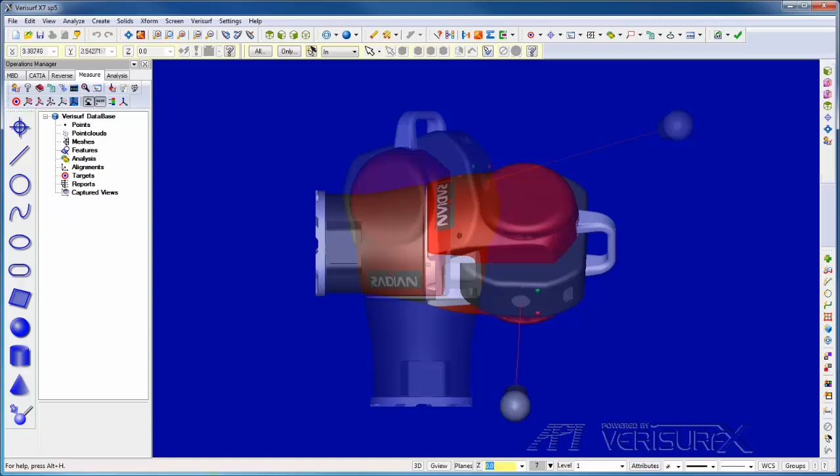The tracker has a measuring range of 160 meters, or 80 meters in any direction. The Radian includes both interferometer and ADM for accuracy as well as ease of use. The tracker mounts vertically, horizontally, or even inverted for measurement in tight quarters.

The iVision system uses an integrated camera for automatic target location and beam capture. Finally, the Radian includes an integrated weather station as well as an internal level. These are just some of the highlights of the Radian hardware. Next, we'll look at the software.

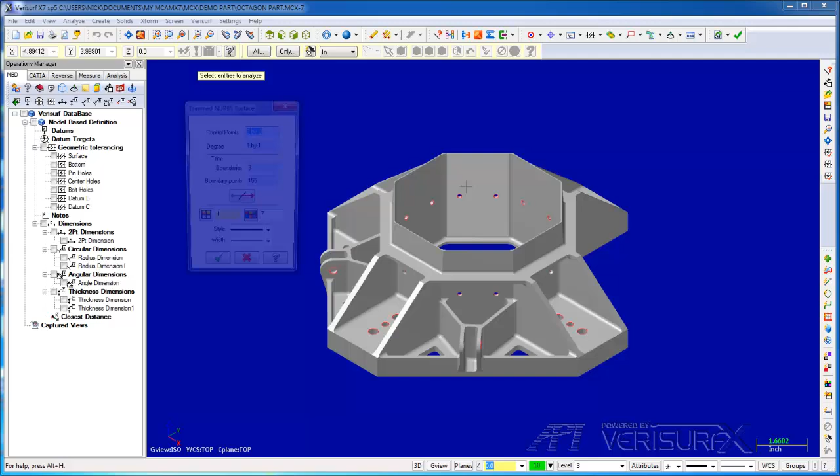Verisurf's metrology software is built on a CAD platform, giving it full CAD design capabilities. CAD is required for reverse engineering, but it's also very helpful when inspecting complex parts. For example, we can analyze the model, we can pull dimensions from the model, we can even manipulate the model. In addition, CAD tools such as colors, levels, and attributes allow us to manage large part assemblies.

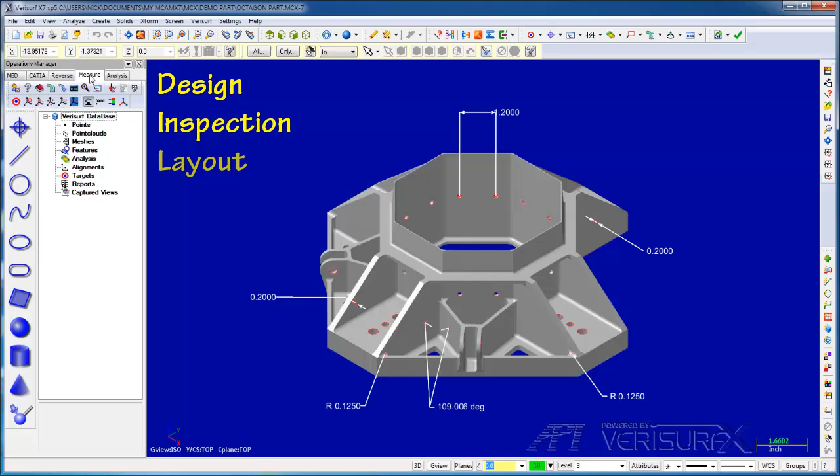Verisurf integrates design, inspection, layout, analysis, and reverse engineering all into a single application. Finally, Verisurf is designed for both print and model-based workflows. I'll continue by loading a model of our demo part. Verisurf reads all popular CAD files, CATIA, NX, ProE, SolidWorks, etc. in their native format. This avoids the limitations of neutral formats such as STEP and IGES, which Verisurf also supports.

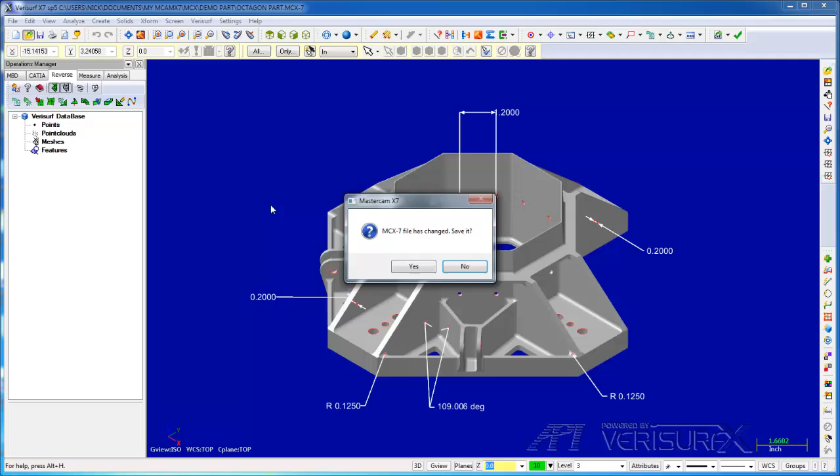When we open a native file, Verisurf saves it in the MCX format and leaves the original file intact. All the data, including the model, the measurements, the reports, and the analyses, are stored in a single file to simplify handling and to prevent data loss. I'll select the MCX format and open our demo part file. The part is in place and the model is loaded. In the next step, we'll align the Radian tracker to the part.

After we load a model, we typically align the device to the part so we can get real-time feedback on tolerance condition. We'll use auto-align since it's the easiest way to align to a model. We start by placing alignment targets on the model to control the orientation of the part. Since the Radian is in front of the model, we'll place the alignment targets where they can be seen on a clear line of sight from the tracker.

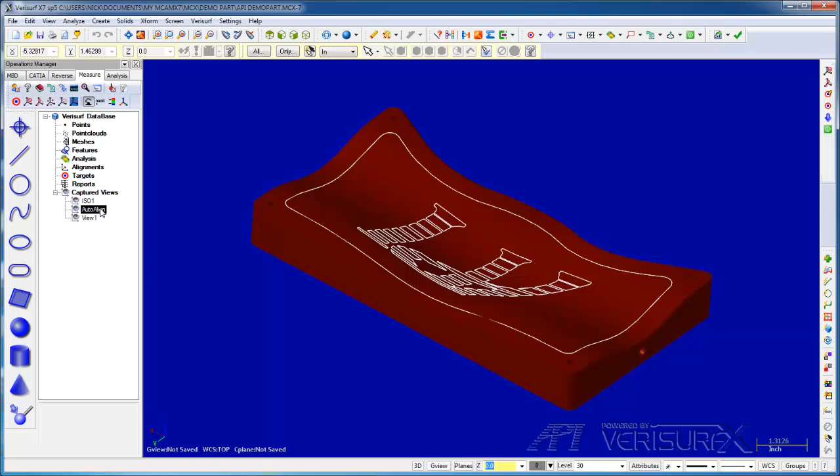I'll start by selecting an appropriate graphics view for the targets. I'll then choose Create Target and place alignment targets on the top, front, and side of the model. Since I want the graphics view to match the camera view, I'll restore the original view. Before I run the alignment, I'll edit the targets and enable Use Smart Point. When we use the Smart Point measuring method, Verisurf records the target when I hold the SMR stable on the part.

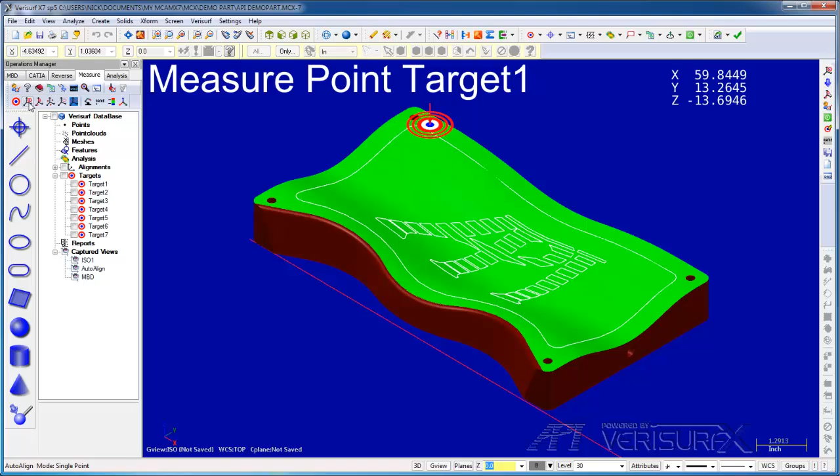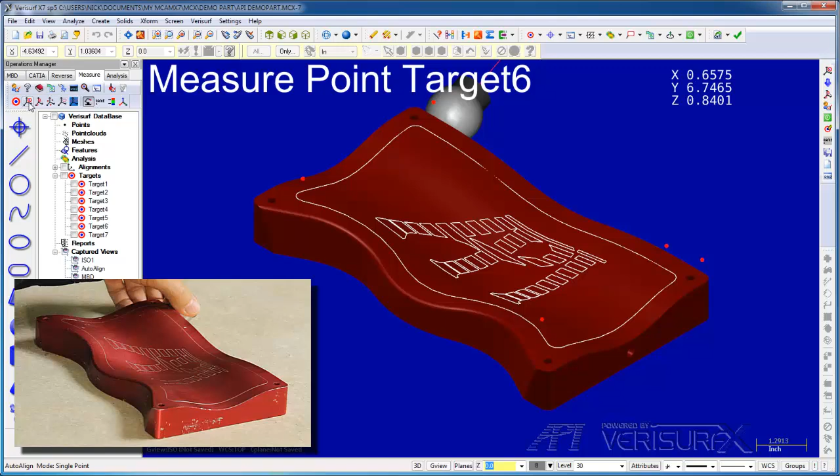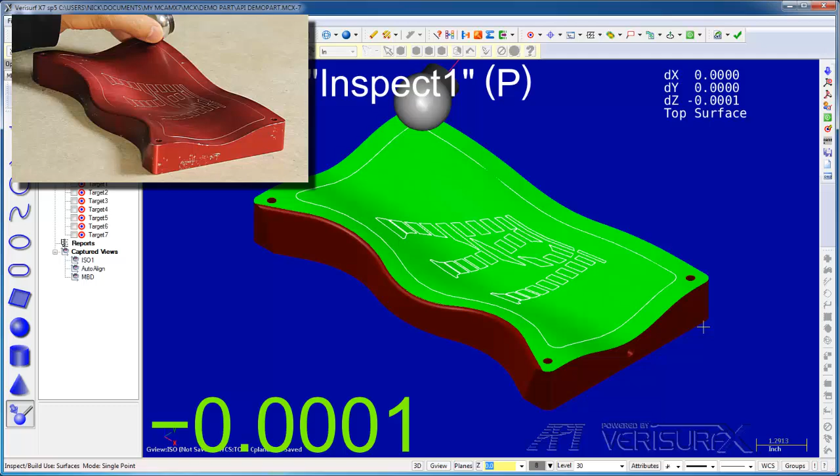The small deviations we see as I move the SMR around the part indicate a good alignment between the part and the model, which shows that our alignment is correct. This final check validates the whole auto-align workflow because it shows we had the right part, the right model, and we didn't make any mistakes measuring the part.

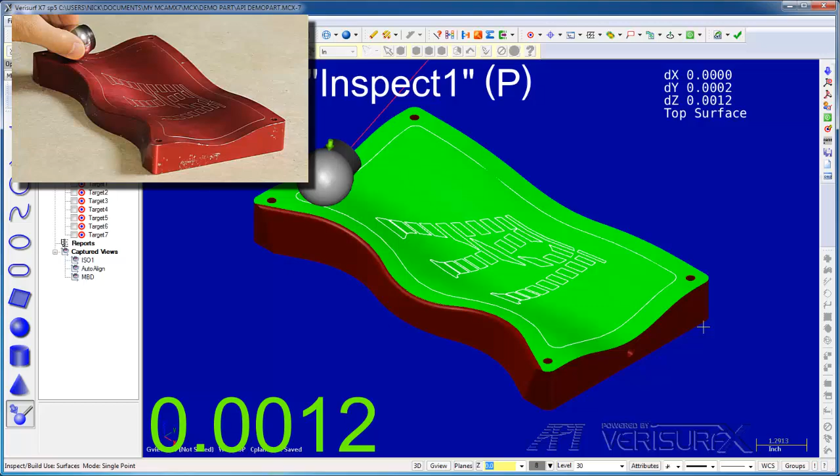Auto-align is a very powerful tool for model-based alignment, but it's easy enough for beginners to use, and the results are easily verified using Inspect Build mode. The Radian is now aligned to the part. In the next step, we'll check surface profile.

In the previous step, we used Inspect Build mode to verify our Radian alignment. Inspect Build is a special measuring mode that displays in real time the deviation between a part and the corresponding features in a CAD model. When we're inspecting a part, the deviation reflects the material condition.

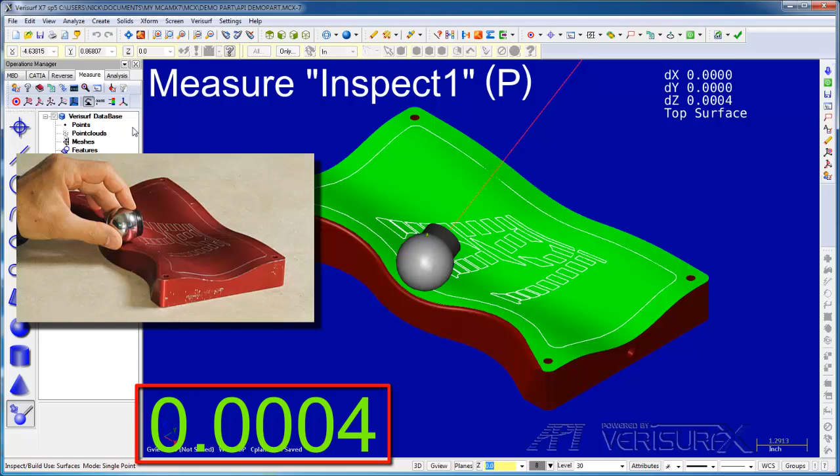When we're moving a part into position, the deviation shows us how far to move and the arrow indicates the direction. Since the Radian is already aligned to the part, when we check profile, we'll assume the deviations are due to errors in machining of the part. I'll continue by measuring deviations in single point mode on the top of the part.

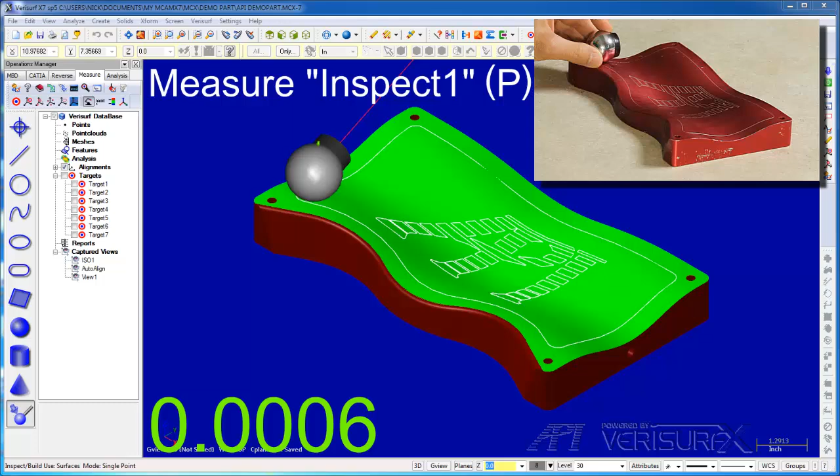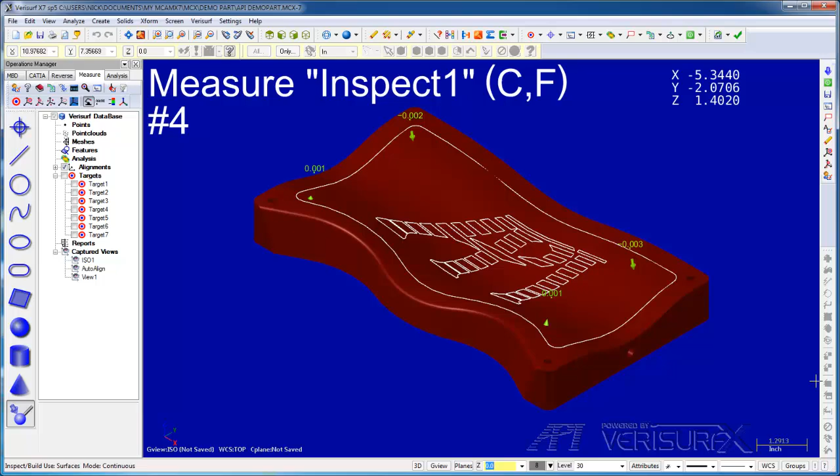Notice how the deviations are represented using an arrow and deviation text. Next, I'll switch to continuous mode and scan deviations around the part.

When I press Escape, Verisurf creates an analysis object in the data tree. If I highlight the analysis, we can see the distribution of deviations in the color bar. If I double-click the analysis, we can change the way the deviations are displayed. For example, we can add borders to the text, we can switch from lines to spheres, and if we enable

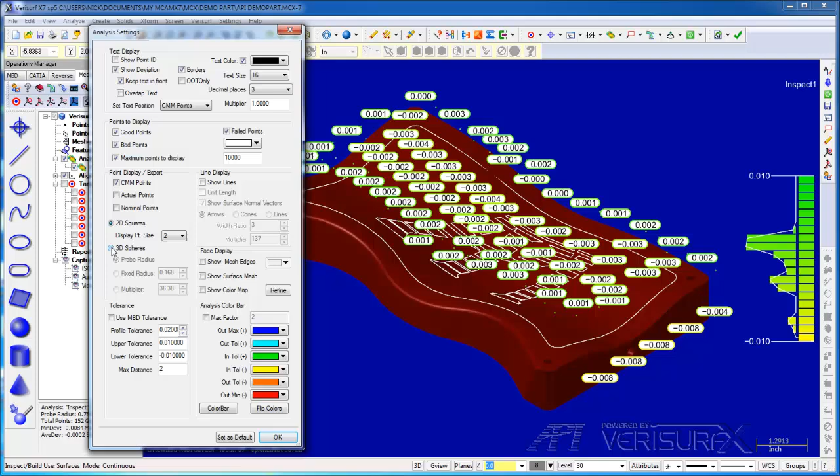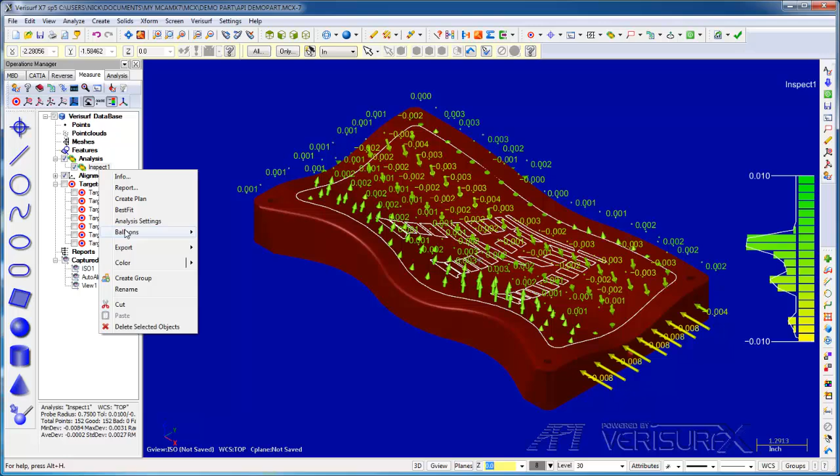Use MBD Tolerance, Verisurf analyzes the data to the tolerance callout for each surface. Otherwise, it uses the global profile. I'll restore the original display and then save the results. Next, I'll annotate the deviations using balloons. I'll apply balloons to 10 random points. If necessary, we can manually rearrange the balloons.

I'll save the results, highlight the analysis, and create a report. I'll rearrange so that the screenshot is on top. Then I'll access Settings and change the logo from Verisurf to API. We have a number of output options, including PDF, HTML, Excel, Word, etc. I'll leave it at PDF and create the report.

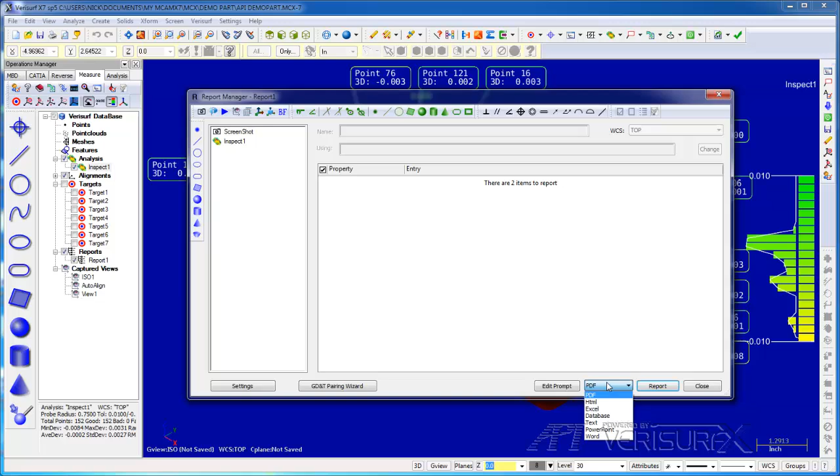When the report opens, we see the API logo in the header of the report. We see the annotated deviations in the screenshot, and we see the details in the body of the report. We've just seen how to use real-time deviation analysis to check surface profile. In the next step, we'll use it to position our demo part.

When we use build mode to position a part, we assume the form of the part is good and the deviations are due to errors in the position of the part. We refer to this use of real-time deviation analysis as build mode because it's often used to build fixtures and assemblies, but we can use it anytime we want to position an object in 3D space.

We'd normally start by aligning the device to the basis of the CAD model by measuring features with known CAD values. We did this in auto-align. We'd then build parts into position by moving them to their nominal locations. Since the API tracker is already aligned to the basis of the CAD model, we'll simply move the part and build it back into position.

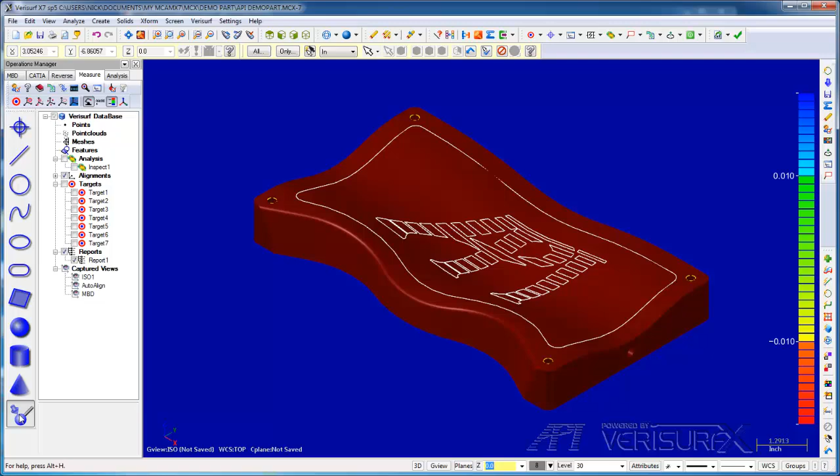I'll select and build to circles first because that's a quick way of getting the part close. I'll place the SMR into one of the holes and move the part in the direction of the arrow. This is just to get it close, so I won't bother using a pin nest. I'll then move to a second hole, repeat the process, and try not to move the first hole.

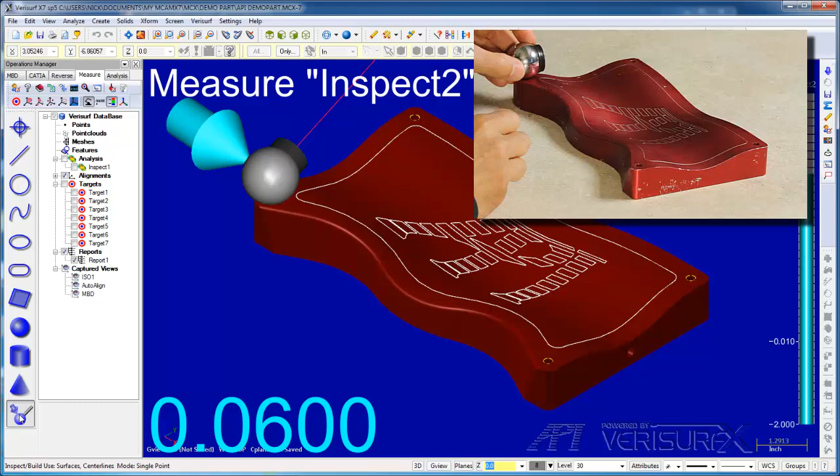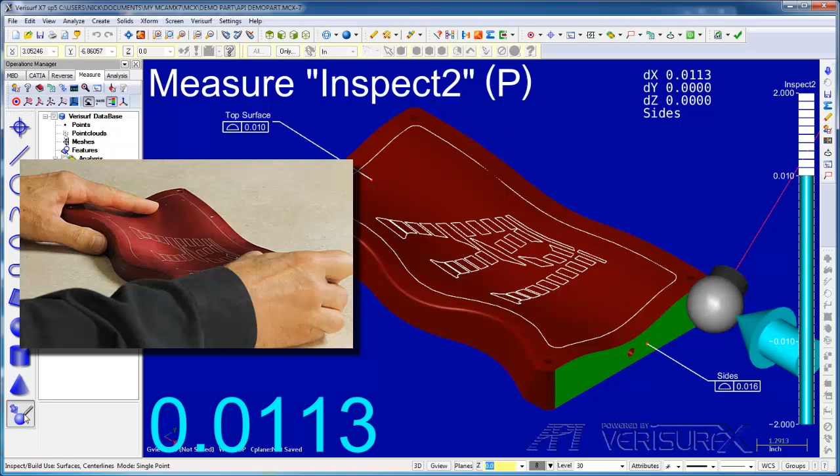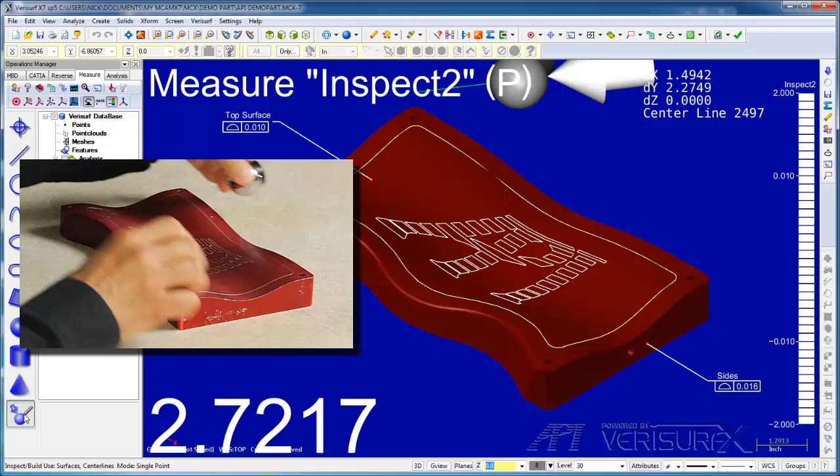When I'm close, I'll cancel the selection, display MBD, and build to surfaces to get it closer. I've enabled Use MBD Tolerance so we can use Surface Profile to control the build tolerance. In other words, as long as the surfaces are located within their profile tolerance, we'll consider that the part's in the right location. I don't have to get this to 0, I just want to get it within tolerance.

It's green everywhere, so we'll call it good. This is a very simple example of a build application. Positioning a part in 3 dimensions is much more complicated, but the process is essentially the same. We've now positioned the part within tolerance. I'll tweak it a little bit for our next step.

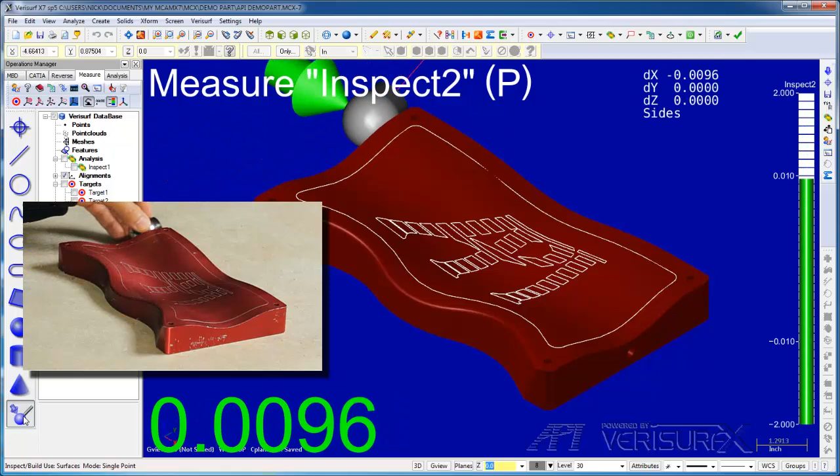We've used Inspect mode to check our part in real time. In the next step, we'll perform a similar analysis, but we'll start by measuring point clouds. I'll begin by running Inspect mode to verify the device alignment. We know the part is good because we've already inspected it, and we know the alignment's bad because we left it that way at the end of our build demo.

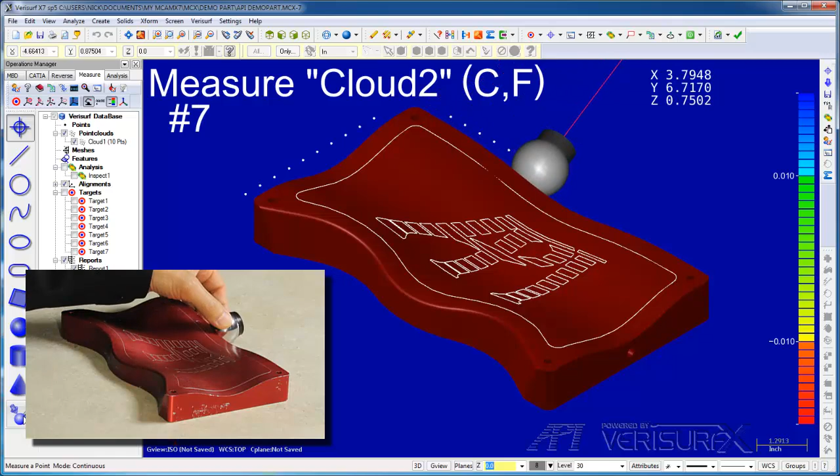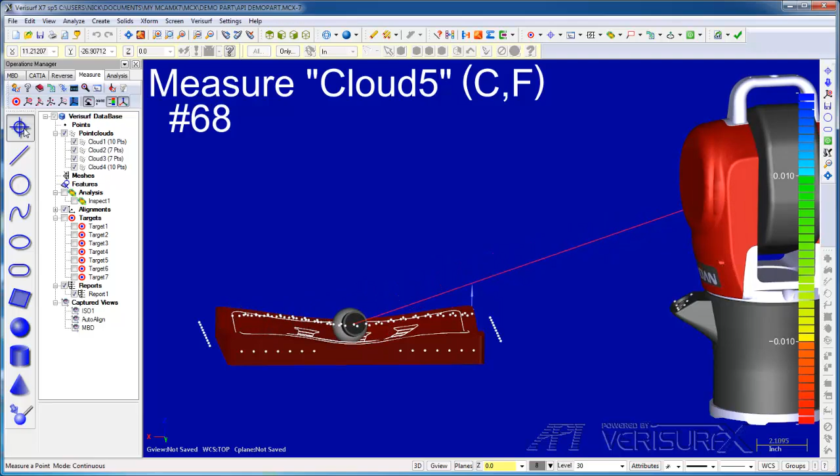I'll switch to point collection and scan point clouds around the part. We're not getting real-time deviation analysis, we're just collecting raw probe center data. When I'm done measuring, I'll press Escape and highlight the Analysis tab. I'll select the point clouds and choose Analyze.

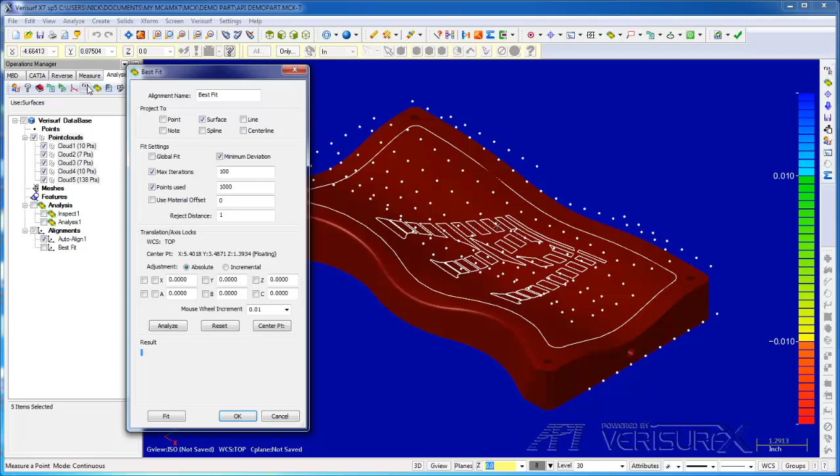The results are similar to what we saw in Inspect mode, but the deviations are much larger because of our intentional misalignment. I'll hide the analysis, select the point clouds, and run Best Fit. I'll start by running a baseline analysis. When the fit is complete, the results show the part is good, similar to what we saw in Inspect mode. I'll choose OK and apply the Best Fit.

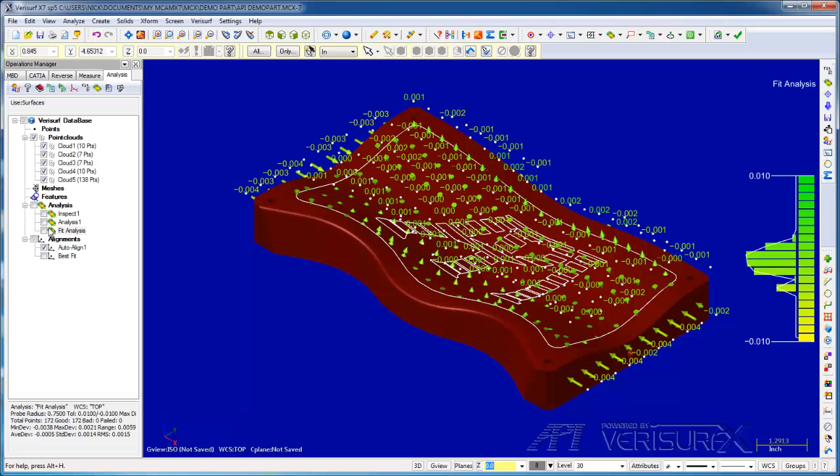If I toggle between the before and after Best Fit, we can see the improvement. I'll select the Measure tab and run Inspect mode. We can see from the small deviations that the Best Fit is applied to the device alignment as well. Inspect mode, which we saw earlier, and Analysis, which we just performed, are very powerful tools for model-based inspection. Next, we'll measure and analyze prismatic features.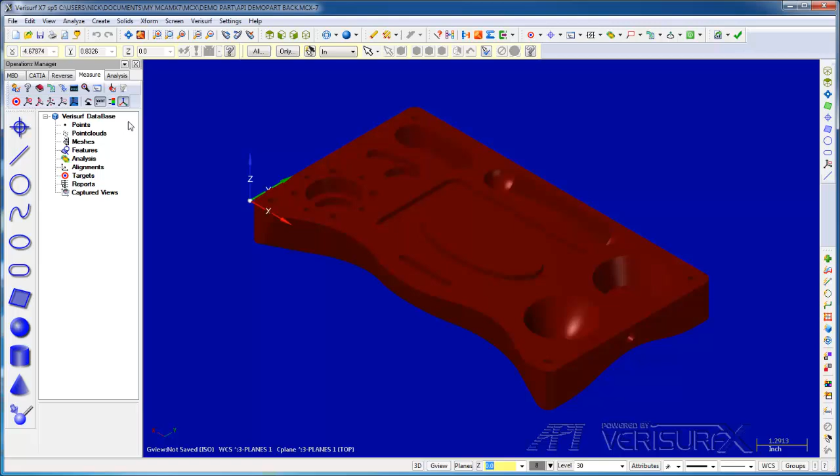All of the workflows we've seen so far have been model-based. We've aligned to a model, we've inspected and analyzed to a model, and we've built to a model. Next, we'll discuss print-based inspection and reporting of prismatic features. I'll align to the part frame shown here, but since we're not using a model, I'll open a new file. I'll start by measuring a plane and 2 lines for our alignment.

Next, I'll run feature align. We can see that the origin is located at the intersection of the two lines, so our data is aligned correctly. If I place the probe at the origin, we can see the device is aligned as well. I'll continue by measuring features, starting with the large hole.

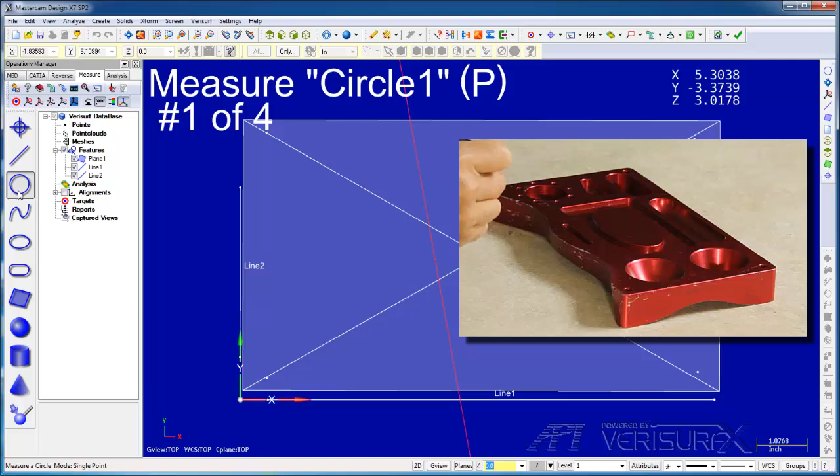Next, I'll measure a slot. I'll measure the 4 holes at the corners as though they were a hole pattern.

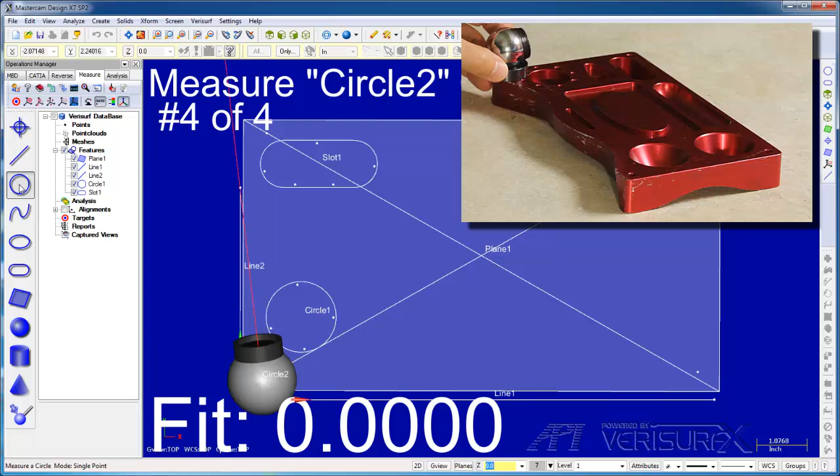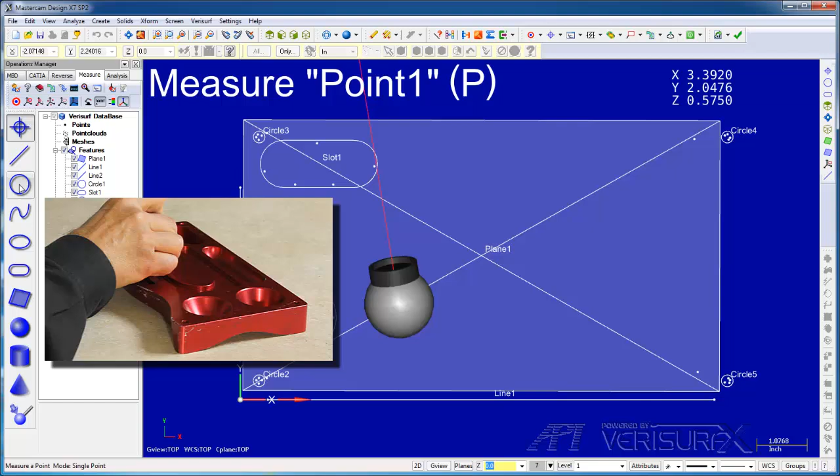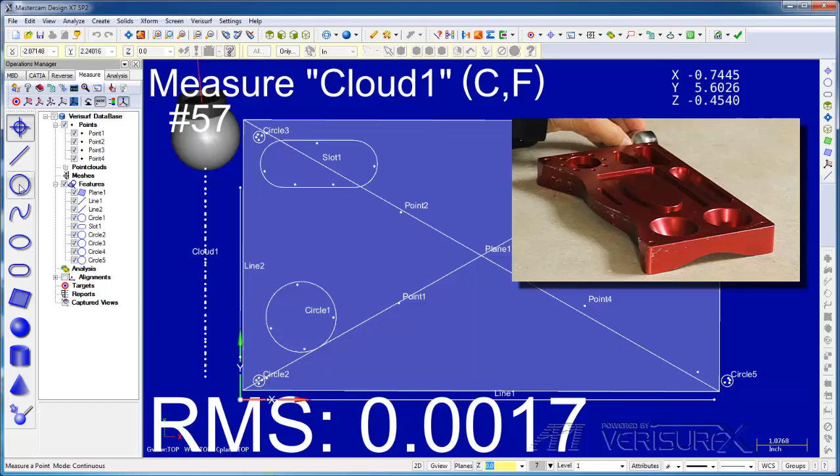Finally, I'll switch to point mode and measure the recessed plane on the top of the part. I'll then switch to continuous mode and scan the plane on the left end. I can fit the 4 points on top to a plane, and I can do the same for the point cloud.

At the beginning of the presentation, I mentioned the use of API's iVision for beam capture. Before I finish this section on measurement, I want to explain how that works. If I break the beam, I simply point the SMR back towards the tracker. The built-in camera automatically locates the target and the tracker resets the distance. I can then continue measuring. In addition to beam capture, iVision also supports other API accessories such as the i360 probe.

All the features we've measured so far are displayed in the data tree. If we highlight a feature, we can see its characteristics such as shape, size, and position. If we highlight 2 features such as 2 points, we can see the distance between them. If we select 2 circles, we can see the angle and distance between them. We've seen how Verisurf and the API tracker measure prismatic geometry. Next, we'll see how to analyze and report the results.

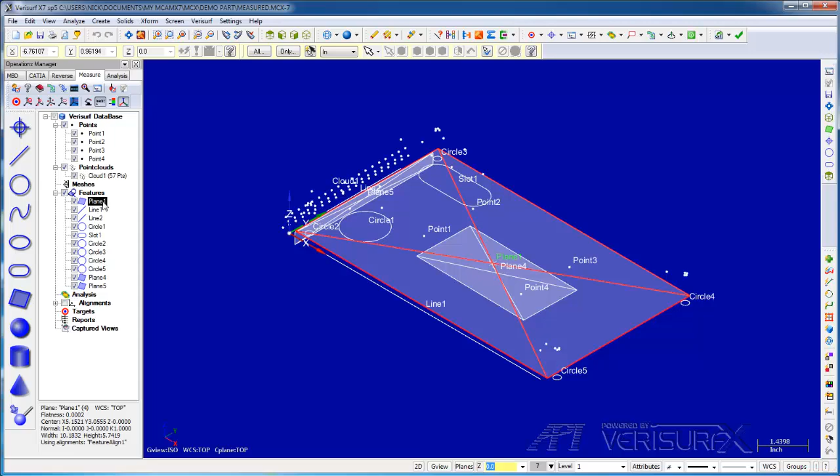We briefly saw the report manager when we reported our inspection results. Next, we'll take a closer look as we analyze and report our measured features. For this report, I'll select the planes and the circles of the hole pattern. When I choose the Reports button, the features are displayed in the Report Manager. If I highlight a feature, we can see its characteristics in the Details pane. We use these fields to enter the nominal and tolerance values. I'll enter the nominals for Circle 2 so we can report its position.

The toolbars allow us to add nominal features, to construct features, and to add GD&T callouts to the report. I'll use them to construct the plane and then the circle through the hole pattern. I'll start by selecting the circles and then choose Construct Plane. With the circles still highlighted, I'll choose Construct Circle to create the center of the pattern. I'll then rename it Center. I'll construct lines from the center to circles 2 and 3.

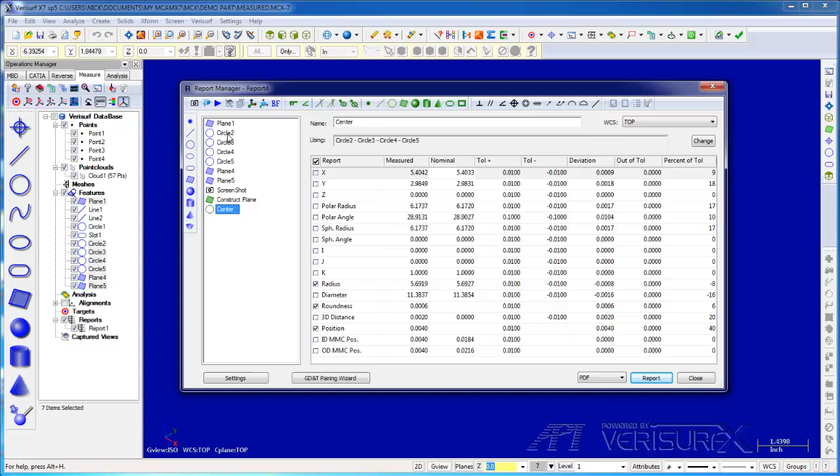I'll then select the lines, calculate the angle between them, and enter the nominal value. I can calculate the distance from the center to circle 2 and enter its nominal value. I can select the two top planes and calculate their parallelism. And I can select the top plane and the end plane and calculate their perpendicularity. Finally, I'll report the position of circle 2.

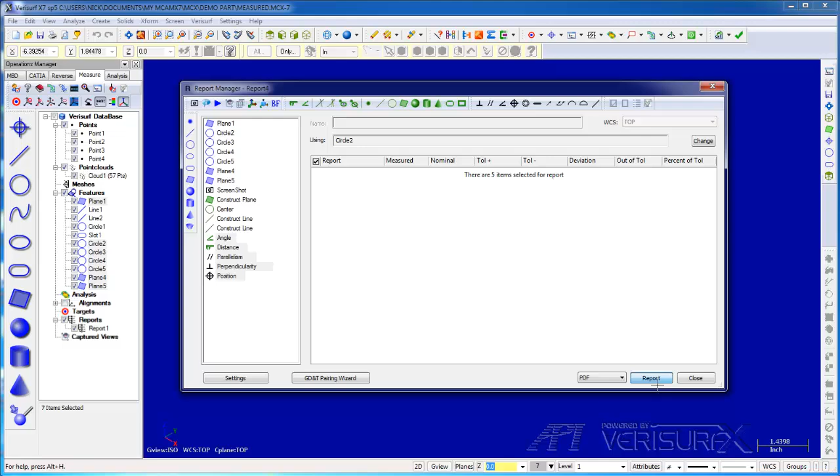I want only the final values for the report, so I'll highlight them before I create the PDF file. When I open the report, we see the API logo in the header, and we see the details in the body of the report. This is a very simple report, but it demonstrates constructions as well as the use of GD&T. Earlier, I referred to the measurement, analysis, and reporting of prismatic features as a print-based workflow, but it works equally well, if not better, with a model.

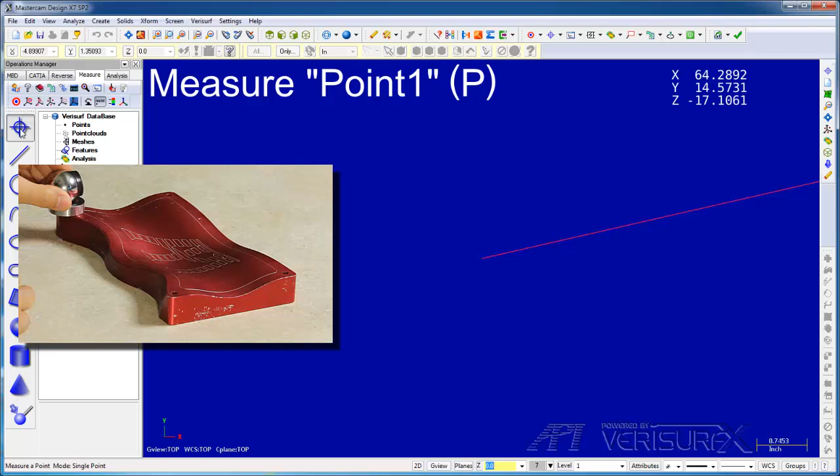For our final example, we'll look at reverse engineering. Verisurf's reverse engineering tools enable mixed modeling with prismatic features, meshes, NURB surfaces, and solids. Moreover, we can take advantage of the many CAD tools inside Verisurf. For this demo, I'll scan and then surface the top of the demo part. Since the part has tooling holes, I'll begin with a simple 3-point alignment. I'll open a new file and measure the 3 points for the alignment. Next, I'll run 3-point align, fit the data to the screen, and accept the alignment.

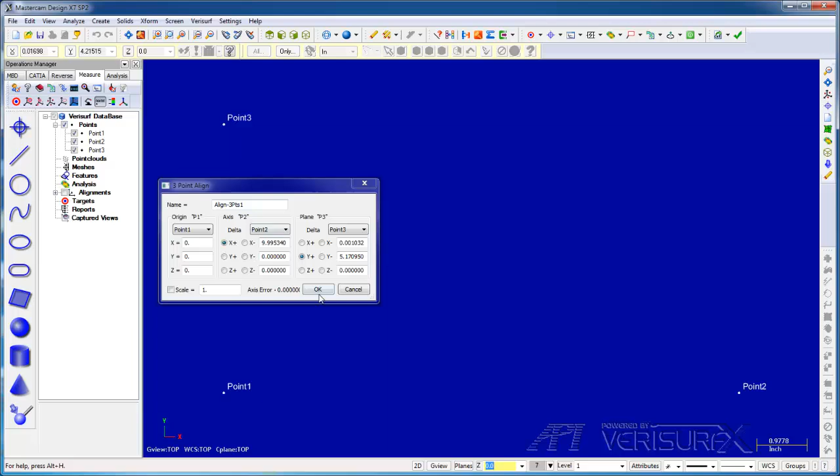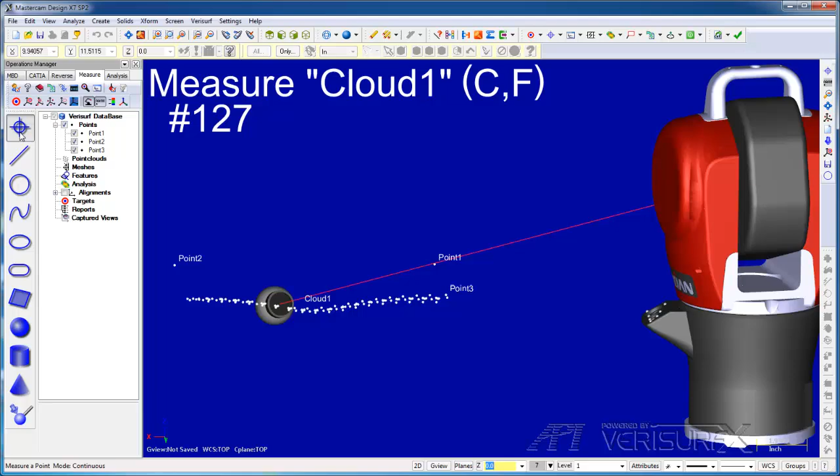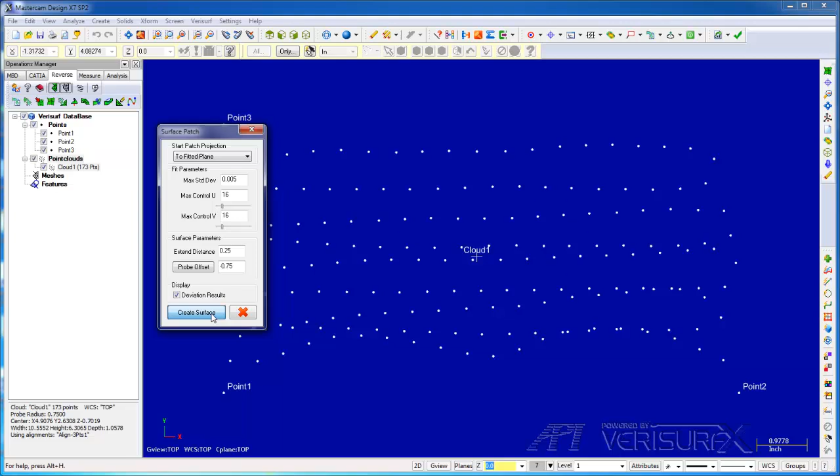I'll continue by scanning the top of the part. When I'm done measuring, I'll press Escape, select the Reverse tab, highlight the point cloud, and choose Patch. The parameters allow us to control the accuracy and complexity of the surface. I'll verify that the probe offset is correct for an SMR, and then create the surface. When the results are displayed, we can see the values are in range, so we'll accept the surface.

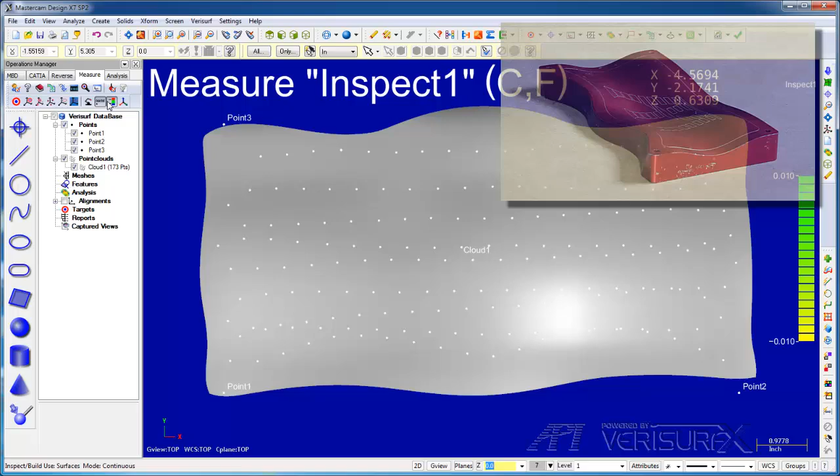We now have a surface that the parameters indicate is good, but how can we check the results? On the Measure tab, we can run Inspect and compare the surface to the part. On the Analysis tab, we can analyze the point clouds to the surface. Since the data from the Radian is traceable, we have a way of proving the accuracy of our surfaces. This is a very powerful capability of an integrated metrology platform. This was a very simple example of reverse engineering, but it shows how easy it is to create and to verify CAD surfaces.

That concludes the demonstration. I hope I've given you a good appreciation for how Verisurf metrology software enables the API Radian tracker with a complete set of model-based tools for alignment, inspection, tool building, analysis, and reverse engineering.